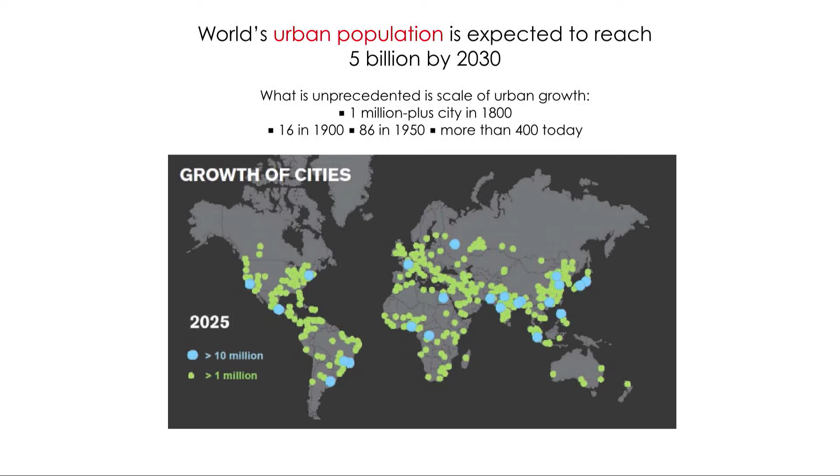First, I'd like to point out two factors that I believe mean eventually all of us will embrace floating structures as part of our development of the cities as well as the use of space. The first factor is that we know that the world's urban population is expected to rise to 5 billion by the year 2030 as people flock to the cities due to job prospects, better food, better medical facilities, as well as a lot more fun and excitement in cities.

In 1800, there was only one city above 1 million, and that's London. Then there were 16 cities in 1900 that went beyond 1 million, and today we have more than 400 cities that are more than 1 million. And our population in the cities actually increased dramatically. In the 1970s, we talked about big cities of 20 million. But in 2015, right now, cities have reached 30 million, and it cannot keep on going at this rate.

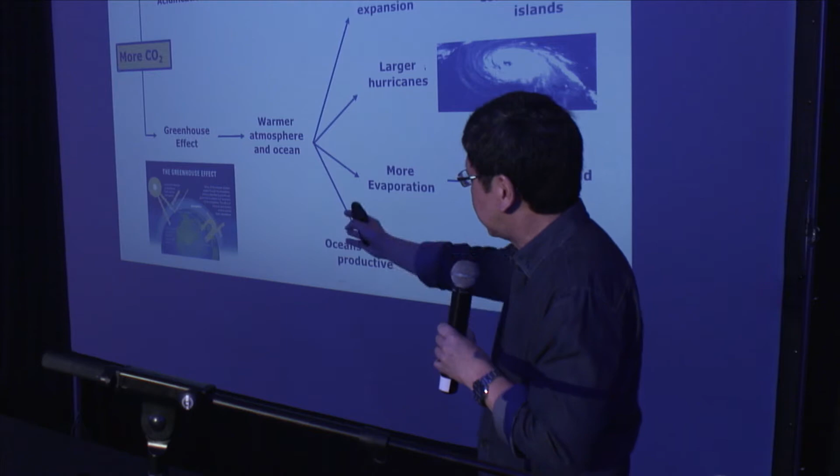And the second factor is that because of the effect of carbon dioxide emission, we are seeing a lot of changes to our planet. Of course, ocean acidification leads to the coral reefs being completely destroyed and less productive fisheries. And the other point about carbon dioxide emission is that it leads to greenhouse effects that warm up our atmosphere and lead to thermal expansion of our ocean, and therefore a sea level rise.

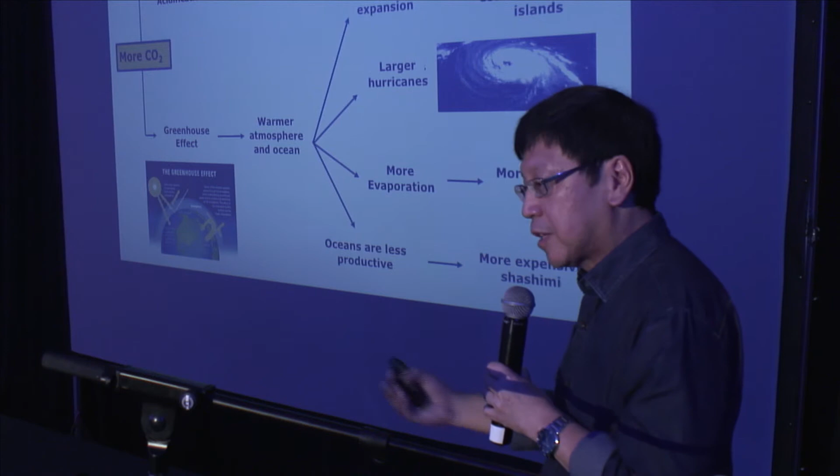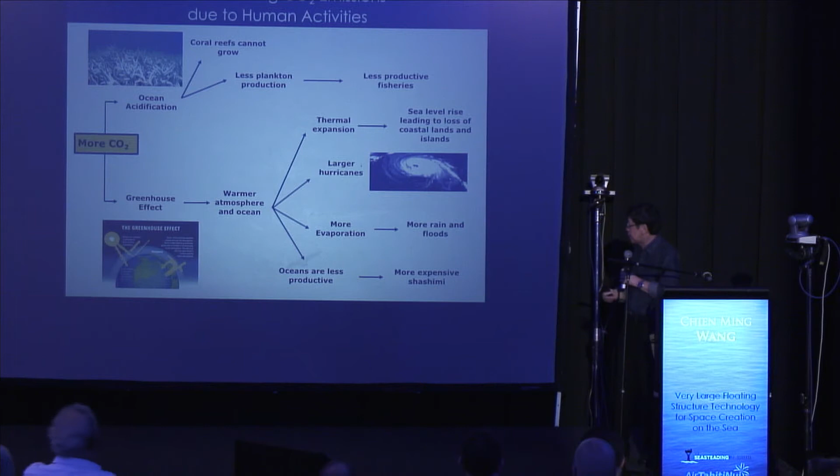We witness larger hurricanes because of the great amount of energy they pick up from the warm oceans before arriving on land. And there will be more evaporation leading to greater floods and rain, and oceans become less productive, leading to more and more expensive fish if we want to eat them.

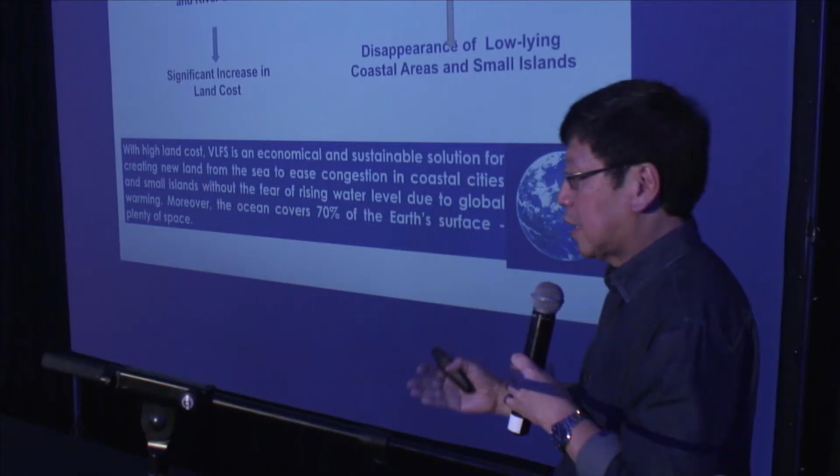So with these two factors, the densification of cities that are usually found on the coastlines as well as on riverbanks or water bodies leads to a significant rise in land costs. It makes floating structures now become very, very economically viable.

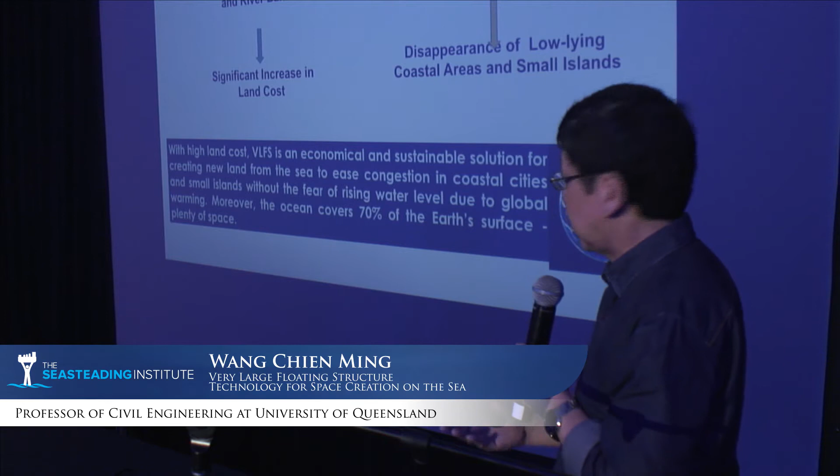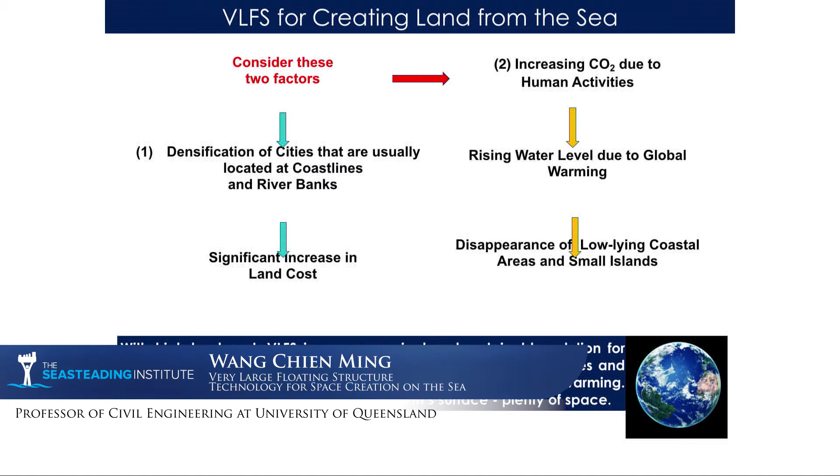And at the same time, carbon dioxide leads to rising water levels and the disappearance of low-lying coastal areas and small islands. So with very high land costs, very large floating structures become a very economical and sustainable solution for creating new land from the sea to ease congestion in coastal cities and small islands without the fear of rising water levels due to global warming. In fact, we have so much water space. 70% of the Earth's surface is covered by our oceans and seas.

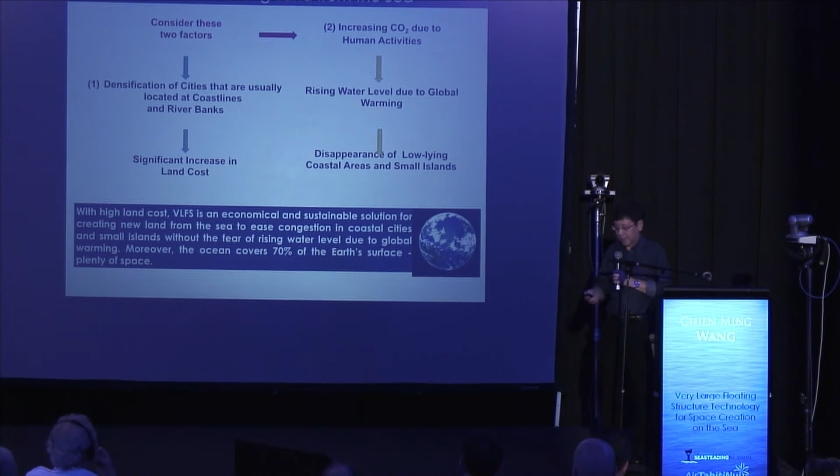Okay, in today's talk, I'm going to tell you a little bit of what is involved in a floating structure and what we can do with floating structures. What are the present applications and future applications of floating structures?

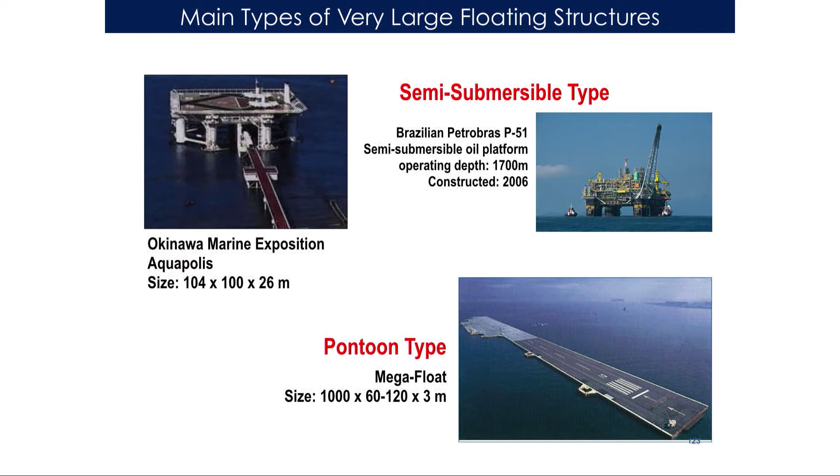Now, basically, there are two main types of floating structures. One type is called a semi-submersible type, where the platform is raised from the water level by columns that give you the ballast. And these are deployed in very high seas where the waves are very, very strong. So if you want to build in the high seas, you need a semi-submersible type.

The other type, which is cheaper, doesn't need the column tubes and so on to lift the platform. The platform just lies and rests on the surface of the water, and that's called the pontoon type.

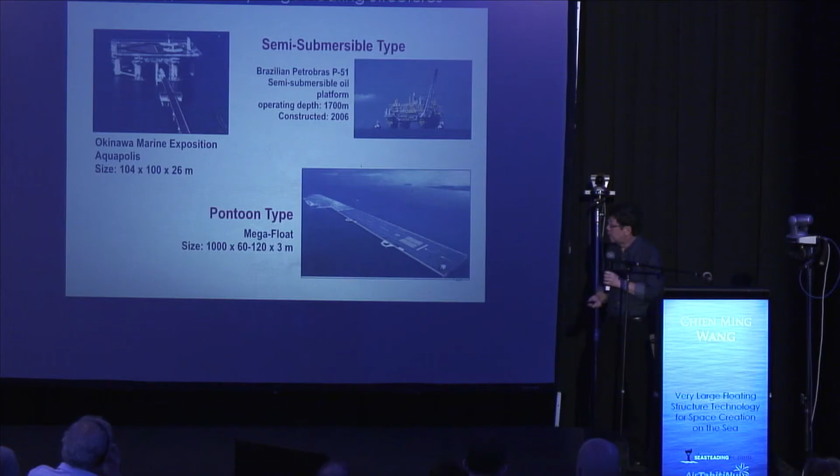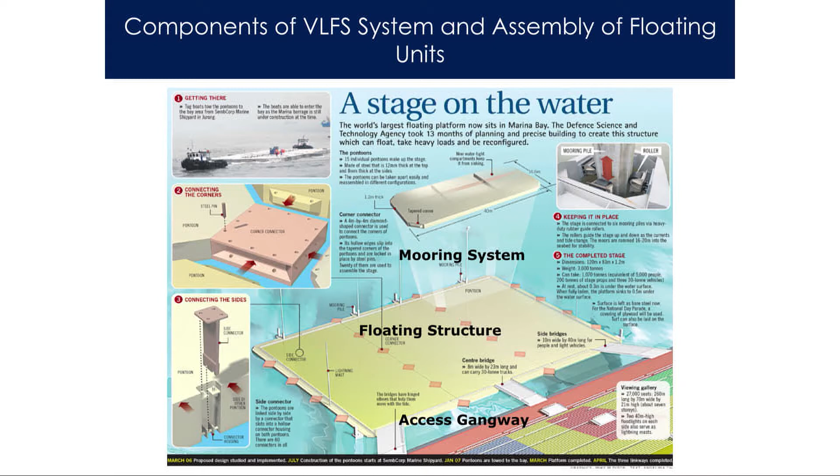It's very, very economical, and it's deployed in very calm seas, such as in a lagoon, cove, or harbor. Okay, so what are the components in a very large floating structure? For a large floating structure, you need a mooring system. The mooring system keeps the floating structure in position. It restricts movement in the horizontal plane, but it allows the floating structure to move in a vertical direction, allowing for different payloads as well as tidal variation.

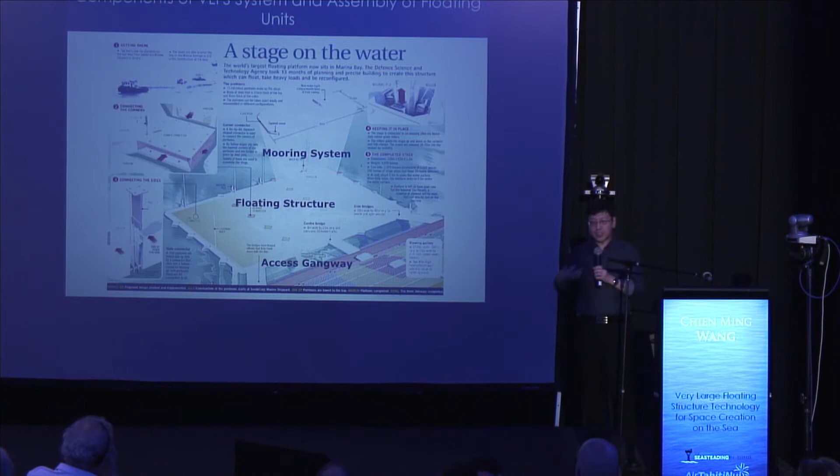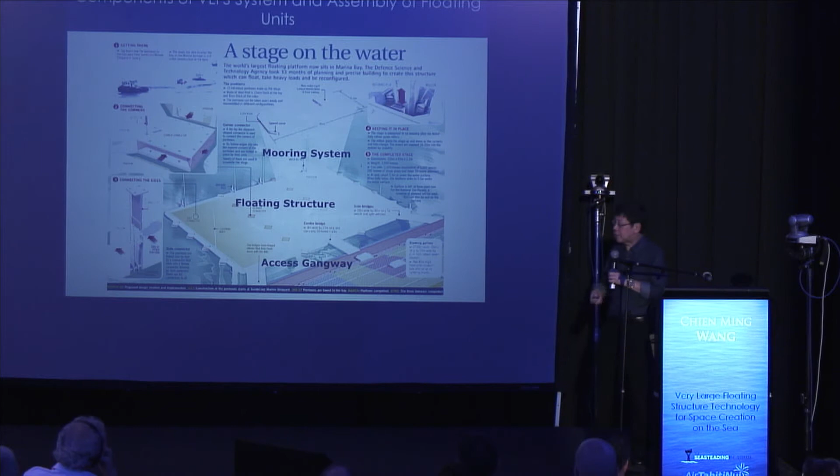At the same time, you must get some access to your floating structure. If it is very close to the shoreline, you can have an access gangway or linkway. But if it is further away, we can build a floating road or floating bridge to your structure. However, if it is much, much further away, you need to create berthing facilities for your boats and ships to come by to supply your floating structure and also to remove whatever waste and supplies from the structure.

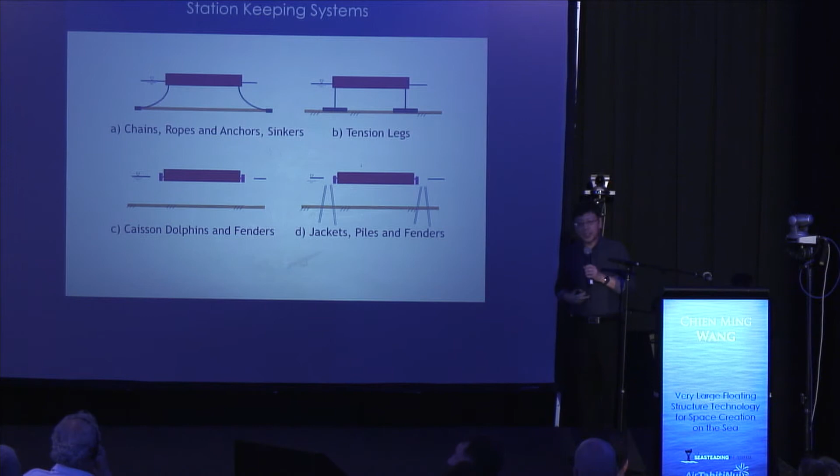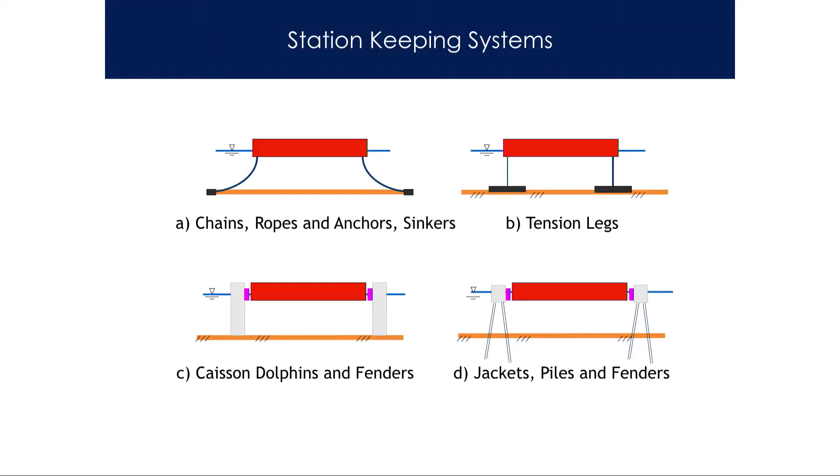I just want to show you the different kinds of station keeping systems. You can have a very simple station keeping system using chains, ropes, anchors and sinkers. But this will allow the floating structure to move considerably because it is free to move with the water currents. The other type is inspired by tension leg platforms. You can have tethers that go down to the hard rock, using anchors or torpedoes, piles, to hold the floating structure. So it's like an inverted pendulum.

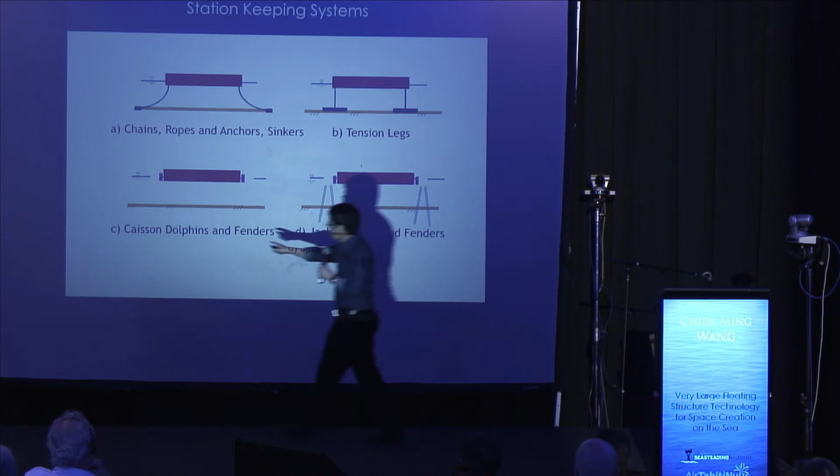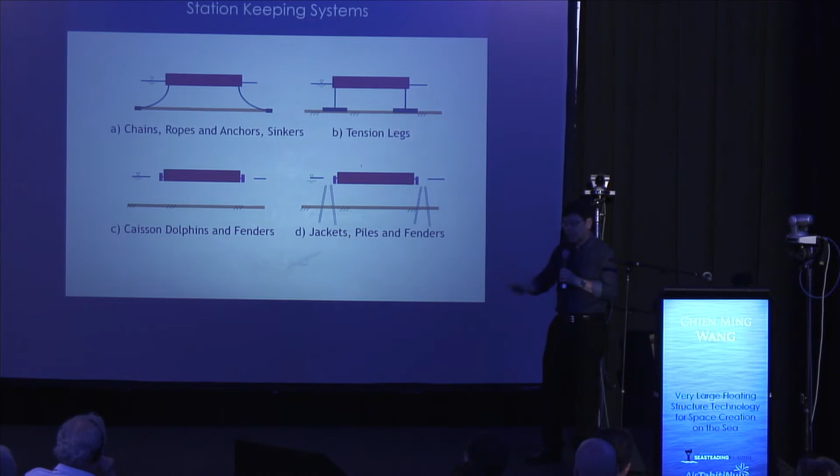Of course, unfortunately, it doesn't come out that well. There is a caisson, which is a rectangular block. It doesn't show up in this diagram here. Caissons are just big boxes that are floated out to position. The seabed is treated and the caisson is sunk in place to provide that reaction wall so that the floating structure can be kept in place by this caisson, dolphins, and rubber fender system.

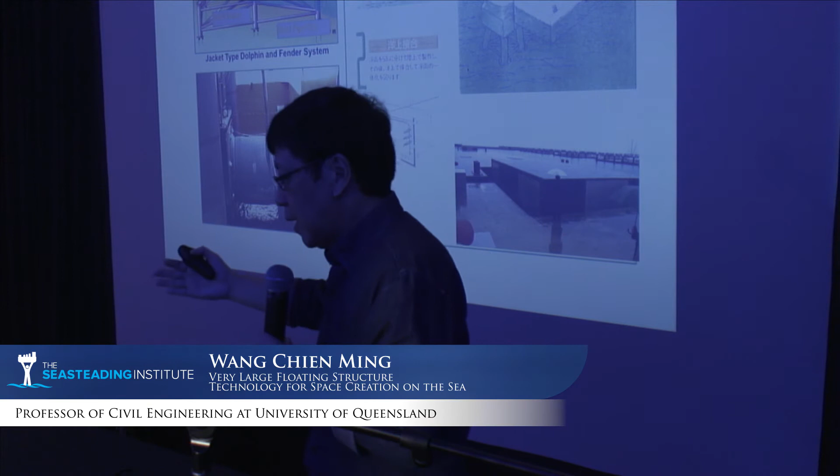If your seabed is not hard at all, you need to use the jacket pile type fenders. Unfortunately, the diagram does not show up that well here. Let me show you how it looks. For example, you could have the jacket pile underneath the water, with a collar and a mooring dolphin head to hold the floating platform in position. Now, the rubber fenders are critical because they allow the absorption of the horizontal force due to the current as well as the wave and the wind on your floating structure.

The rubber fenders are not cheap. Some of them are about $200,000, but they can last 30 years. But they are essential for very large floating structures to keep them in place and to absorb the energy so that your mooring dolphins are not unduly huge.

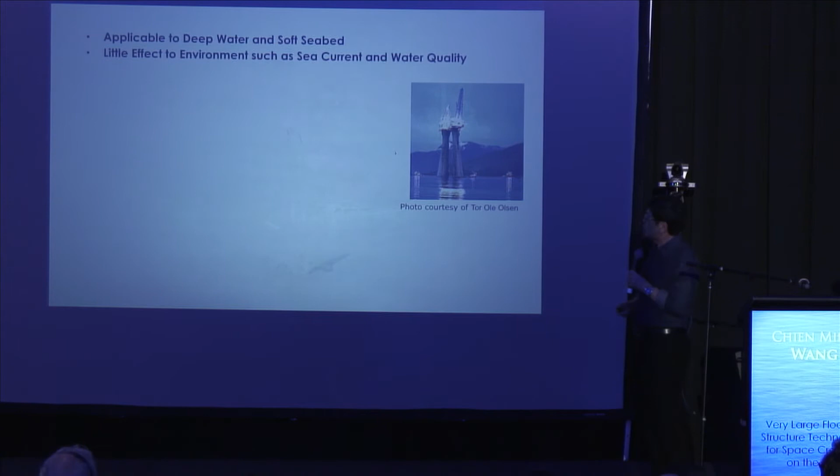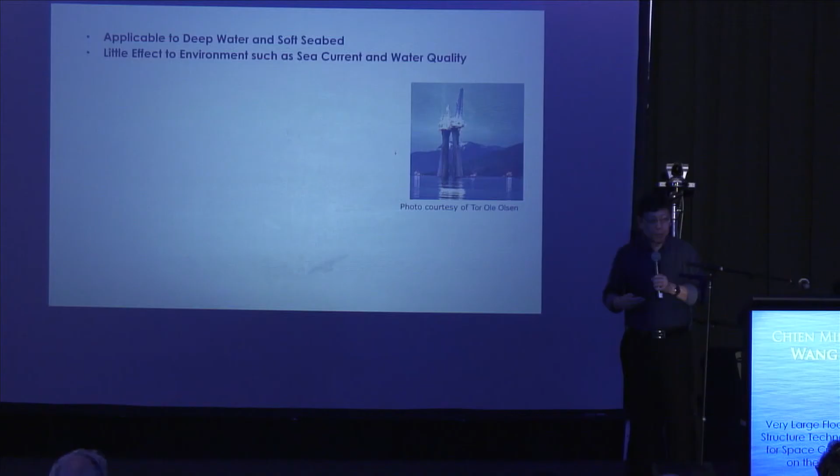What are the advantages of very large floating structures over traditional land reclamation? First, it is very, very economical when you're dealing with deep water and soft seabed. When I talk about deep water, I'm talking about 25 meters and beyond. Anything 25 meters and beyond, it is not possible for land reclamation. It costs a bomb, and in fact, you can lose your whole assets and resources trying to reclaim very deep water. And soft seabed is also dangerous.

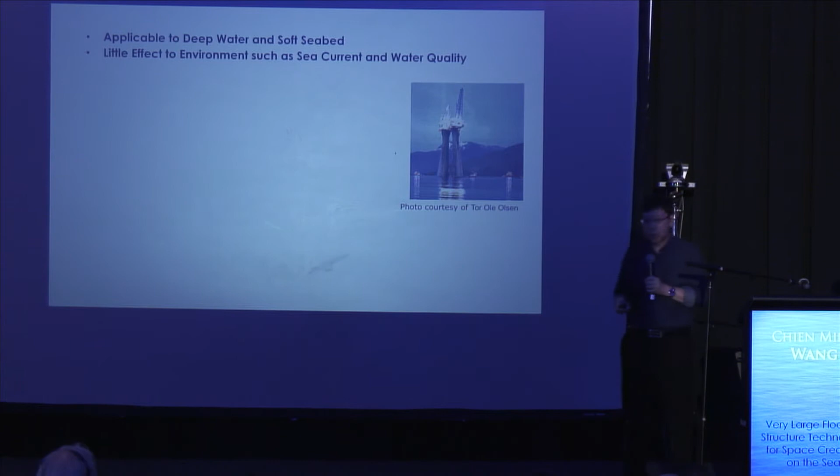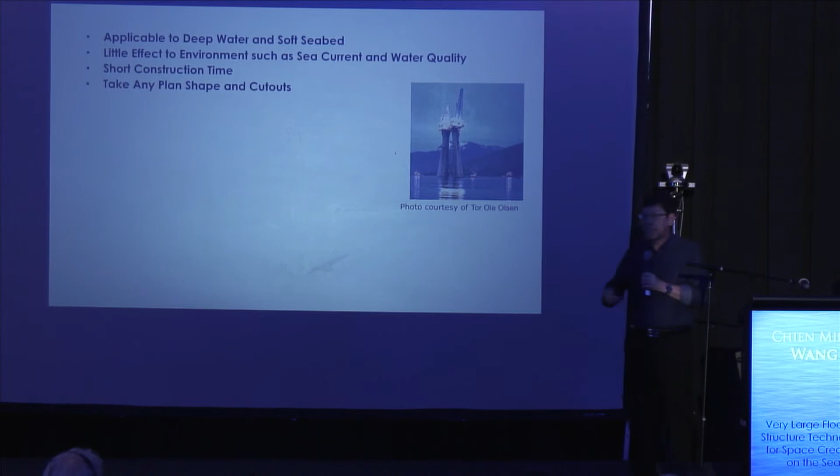When you reclaim, the fill material just sinks deep into the ground, and it'd be incredibly expensive to do land reclamation. Also, a very large floating structure has very little effect on the environment, such as the sea current and water quality. It's almost transparent, allowing any flow of water and sea current below it. Also, very short construction time. You can build very large floating structures within months, whereas with land reclamation, you need many years for consolidation before you can build anything on it.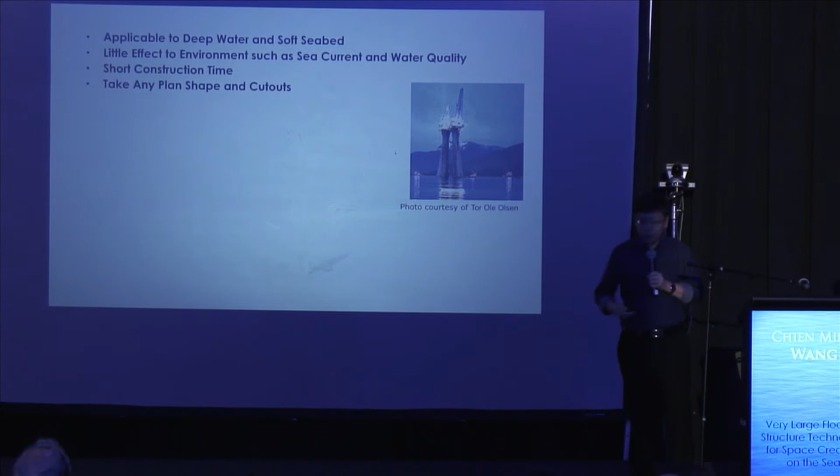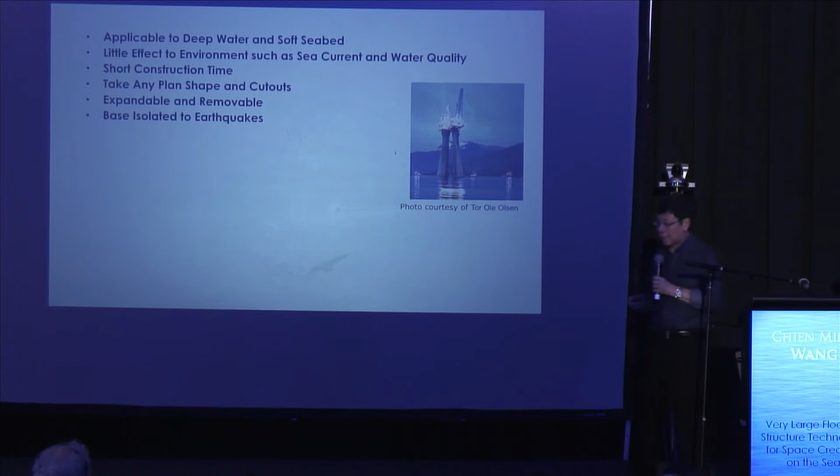It can take any plan shape and cutouts. Your floating island can be of any shape you wish. If you wish to have the shape of your face, we can do that as well. So that's no problem whatsoever. And it's expandable and removable, allowing you to free up sea space if you want to. Business is good, you expand it. It's great against seismic action because it's base isolated, so it's immune to seismic action.

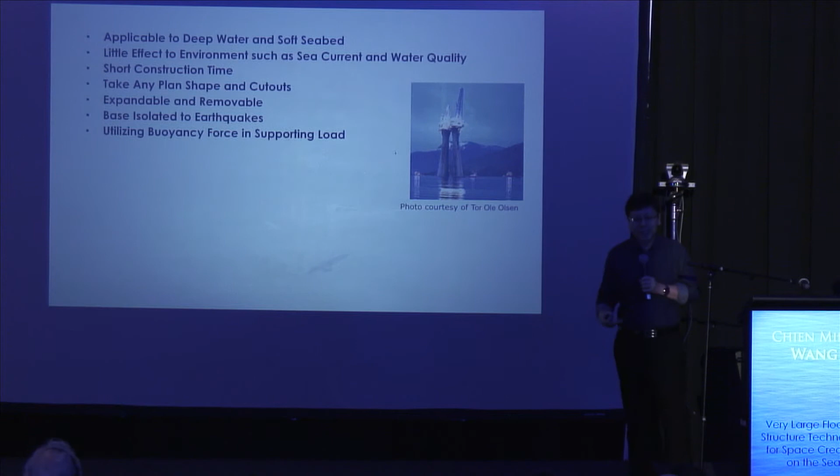It utilizes buoyancy force to support the load, so nature gives you a free pass for this. If you look at the Troll on this particular picture here, you can see that this Troll is about 472 meters in height. It's about 168,000 tons. You can move such a huge structure on water free of charge. If you were to use a crane or rail or whatever on land, it would cost you a bomb to move such a huge structure.

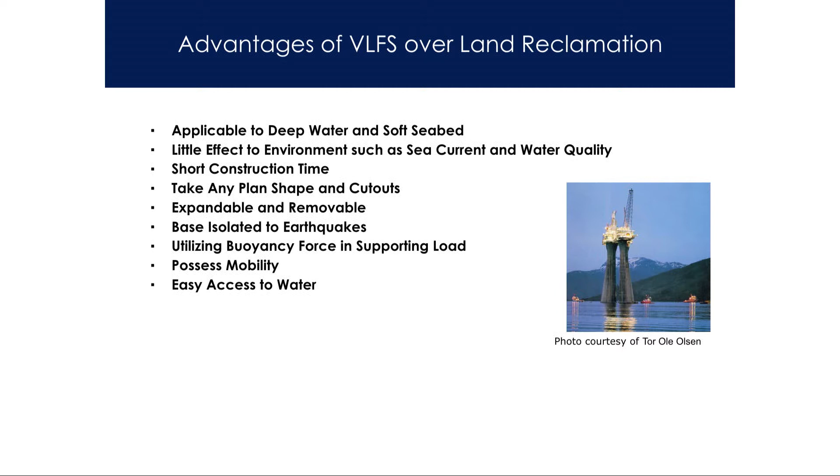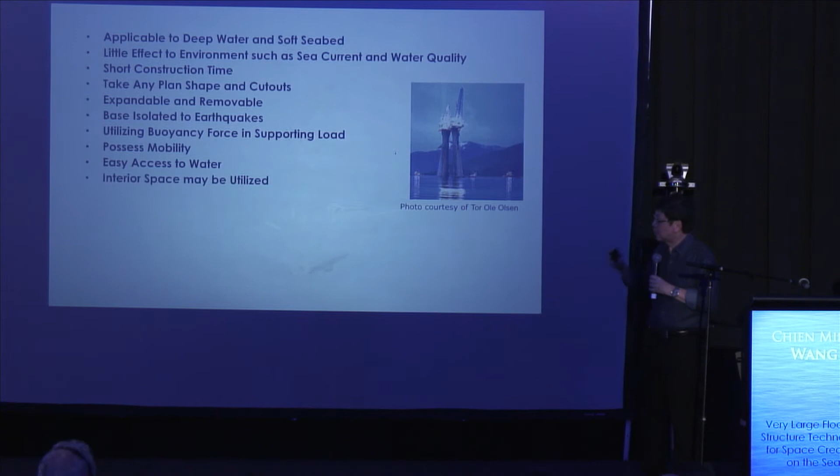Also, it possesses mobility. You can tow it away to any location. For if you've got a desalination plant and that area is contaminated, you can move your floating desalination plant to another area. Easy access to water, so make full use of that easy access to water for your applications. And the interior space may be utilized for storage, for sewerage systems and so on.

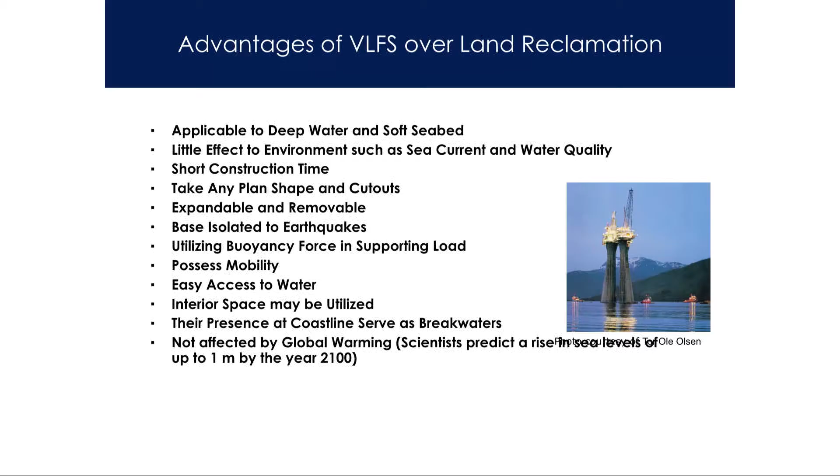The presence on the coastline serves as breakwaters to protect your shoreline, as well as it is not affected by global warming at all. It's like Noah's Ark. It just floats with it. So I want to show to you some interesting applications of very large floating structures.

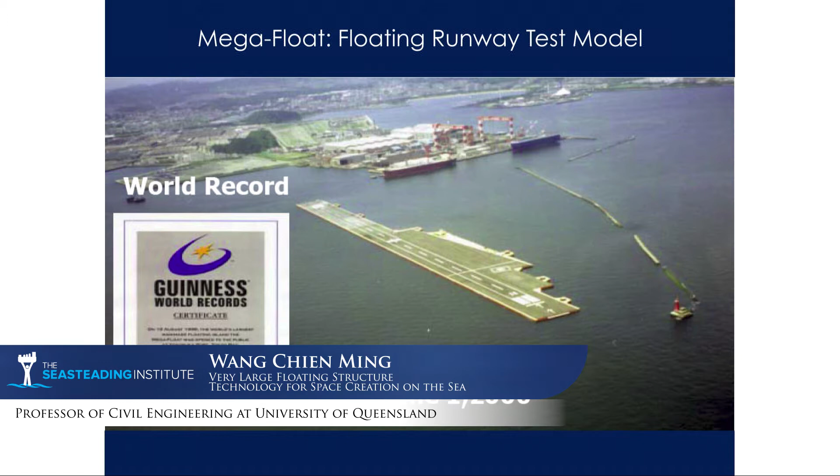And then the Japanese, in the years 1995 to 2000, initiated a program to study the feasibility of a floating airport on the sea. They built this Mega-Float, which is 1 kilometer long, and the width varies from 60 meters to 120 meters. Completed within 3 months construction-wise, moored in Tokyo harbor to study aircraft landing and see whether the devices are affected by the surge, pitch, and roll of the structure.

When I stepped on this Mega-Float, I was amazed. It's almost like stepping on land. You can't even feel a thing. It's just like a fly on the back of an elephant. Would an elephant know that there's a fly there? Absolutely not. That is how it is. The bigger your floating structure is, the more stable it is. It's almost like land. And it went into the Guinness Book of Records as the largest floating man-made island.

Floating bridges and roads are everywhere. King Xerxes, the Persian king, marched his troops to Europe to try to conquer Europe. And they tied 300 boats to form a floating bridge. He built 2 of them and marched over 100,000 troops.

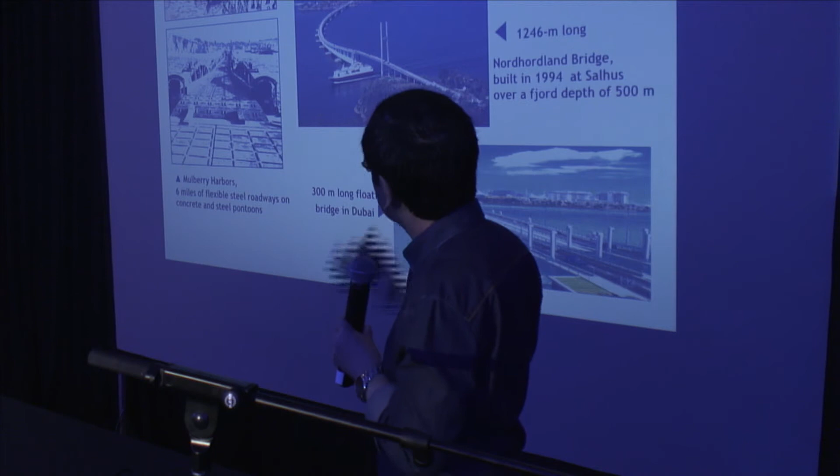The Norwegians used their offshore technology to build floating bridges across their fjords, which are very, very deep. Fjords are 300 meters to 500 meters, impossible to pier down. So they are building these very interesting floating structures, very elegant. For example, the Bergsøysund Bridge uses the flexibility of a connecting rod to move up and down under tidal variations. It rests on 6 concrete pontoons supporting the bridge deck and, of course, the roadway on top.

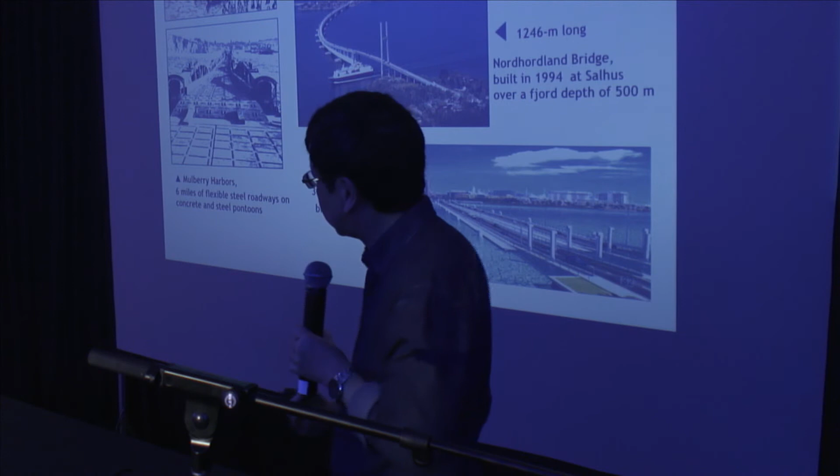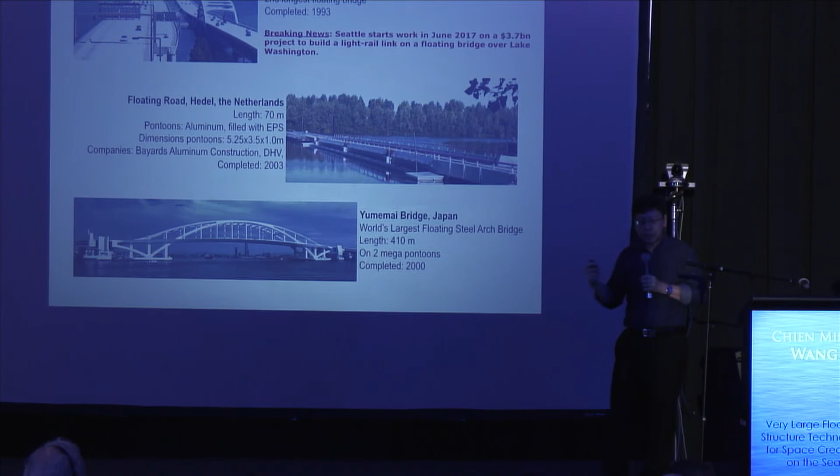Not known to many people also, during the Second World War, the British built the Mulberry Harbour, 6 miles of steel floating on concrete pontoons and steel pontoons to land troops from the ship onto the Normandy beach. Of course, Dubai has the floating bridge. Americans have built these huge, massive floating bridges in Seattle, and they are going to start work this coming June on a floating railway bridge. It's going to be great.

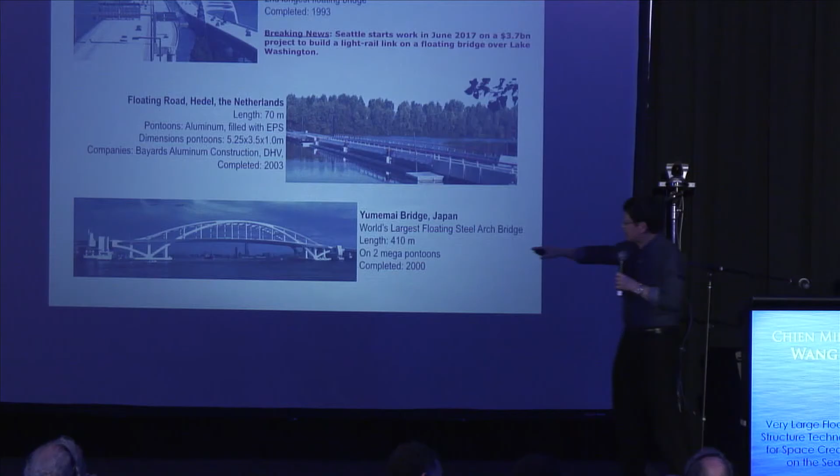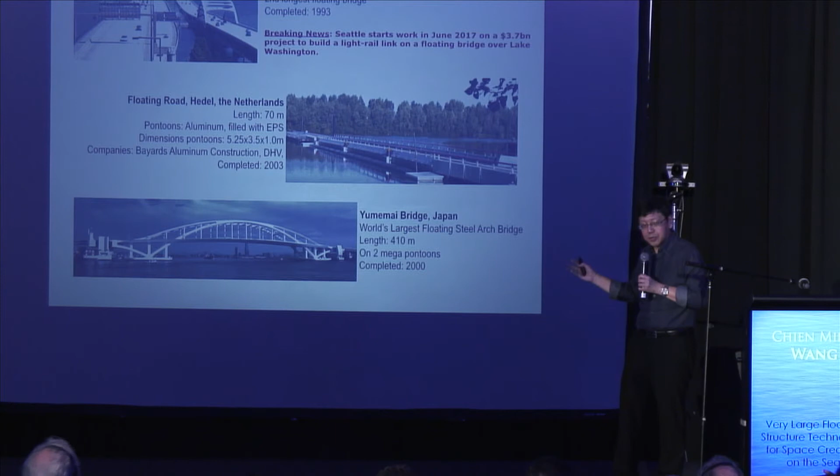And in the Netherlands, in Japan, they've built the longest floating steel arch bridge that spans between 2 reclaimed islands. It's called the Yumemai Bridge. This bridge is about 400 meters, rests on 2 pontoons, and you can see the silver lining at the bottom of the pontoons. These silver linings are made of titanium plates at the splash zones to prevent corrosion. It is able to swing on one pivot here, and the reaction walls can be opened to allow tall ships to pass

through if need be. I'm speaking a bit fast, sorry, because of time.

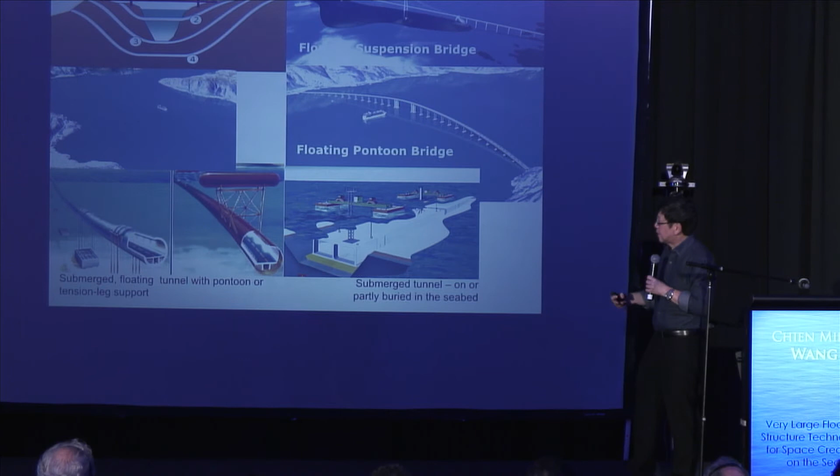And there are also ideas of submerged floating tunnels and so on, because the fjords are very, very deep. Using such technology will save a lot of cost. And in the E39 highway that Norway is building to link the country from north to south, they're going to have several of these floating bridges as well as floating tunnels.

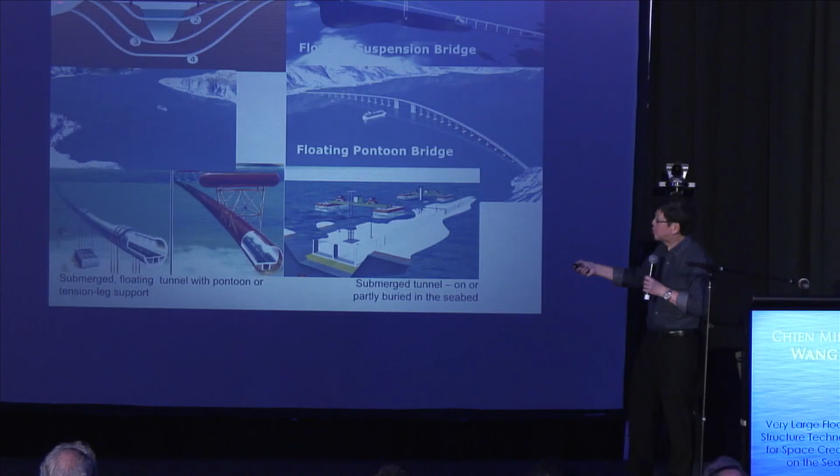You could use a subsea tunnel, but then it would mean a long, long distance, because you just can't have a very steep road going down. You need some gradient. But if you have this submerged tunnel, you can shorten it by a considerable amount. This is going to be a very exciting project that will come on stream shortly.

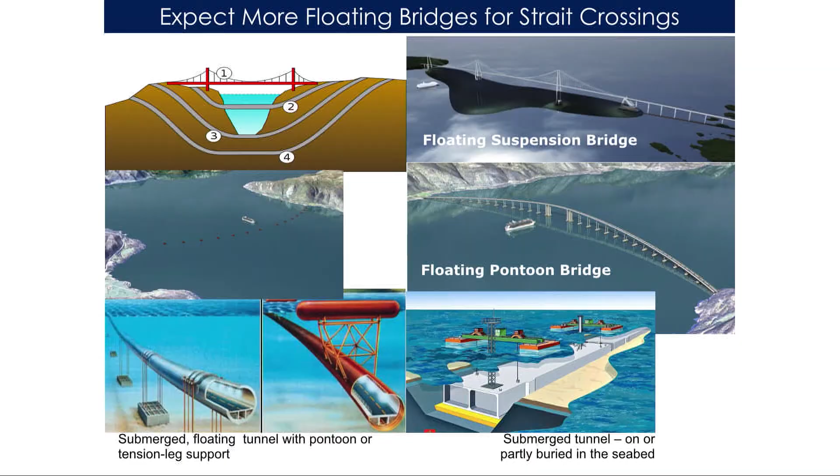Floating structures have been used for piers. The Ujina pier, a concrete pier of 150 meters by 30 meters, 4 meters in depth, has been in operation for 20-odd years without any maintenance at all.

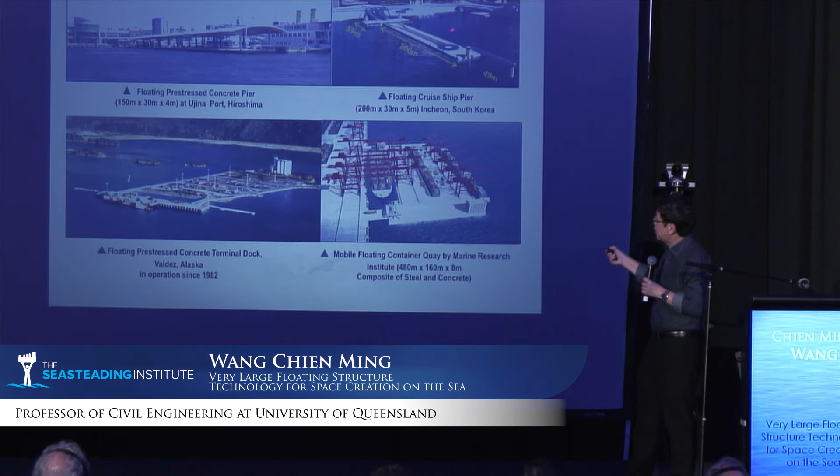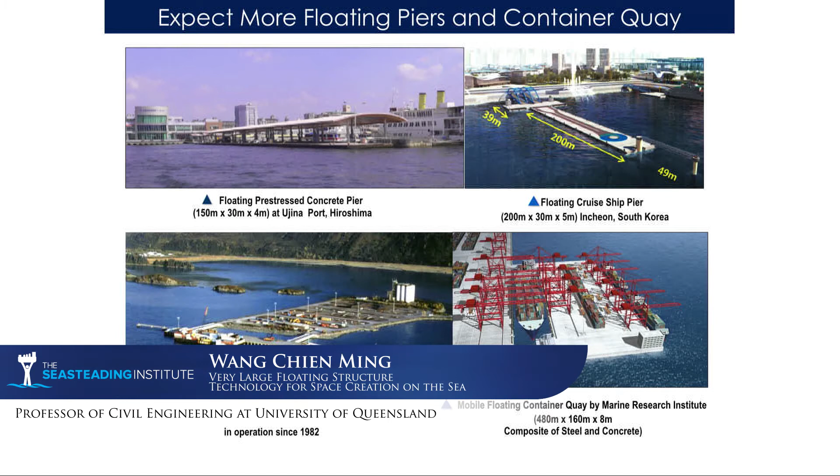And then in Korea, Incheon, they have built two floating cruise piers, one in concrete and one in steel, to demonstrate to the world the capability of building floating structures. And then, of course, in Alaska you have the floating terminal dock and so on. And Norway is going to build the floating dock as well as a cruise center for cruise ships that take tourists to see the northern lights.

Okay, I want to show you also that very large floating structures can be used for aquaculture. There are a lot of fish farms right now all over the globe, and all of them are very near shore. Some of them are inside the bay, leading to a lot of problems with pollution and so on. So there are now steps taken to try to move these floating fish farms offshore, where there will be no problem with pollution.

For example, the Norwegians with Sintef have built this cage, which is about 100 million US dollars, and it can house 1.2 million salmon. One salmon you can sell to the wholesaler for 10 euros, so it's about 12 million euros per cage. So the cage had better not get damaged, because if it does, they just lose $12 million in one go. And there's Aquapods in Hawaii, and they are looking at all these projects.

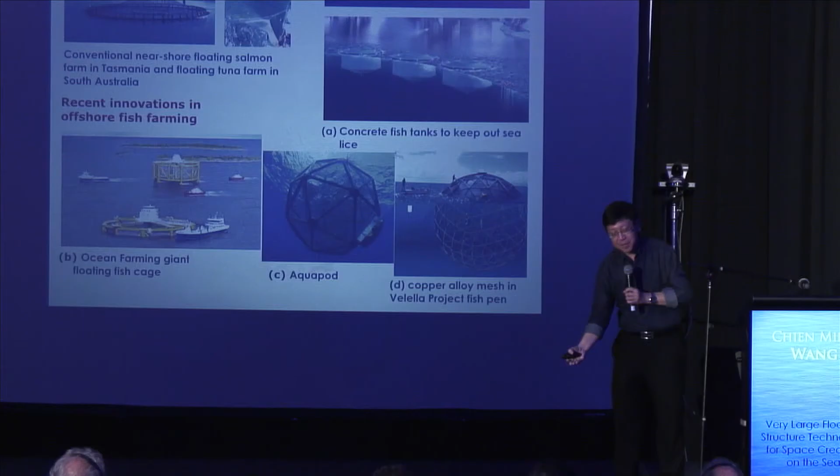In Norway, when they farm the salmon, they discovered they're also farming sea lice, and the sea lice are eating the salmon up. So what they're doing is building concrete tanks and putting a riser down there to bring water from 14 meters below the water level so that there's no sea lice, continuously pumping it so that the fish can have fresh water. But it's costly to farm in an area where there's sea lice. You have to protect your salmon, and they are selling like hotcakes in Norway.

Everybody's having these concrete tanks instead of the usual circular floaters with nets below them. Now they're even building bigger ones, in the shape of a bathtub. Exactly, you look at your bathtub, that's exactly the shape they're building. And then fish farming: Barcelona-based Forward Thinking Architecture has been very strong in this area, and they have come up with ideas of how we can use fish farming, hydroponics, and renewable energy together to provide food.

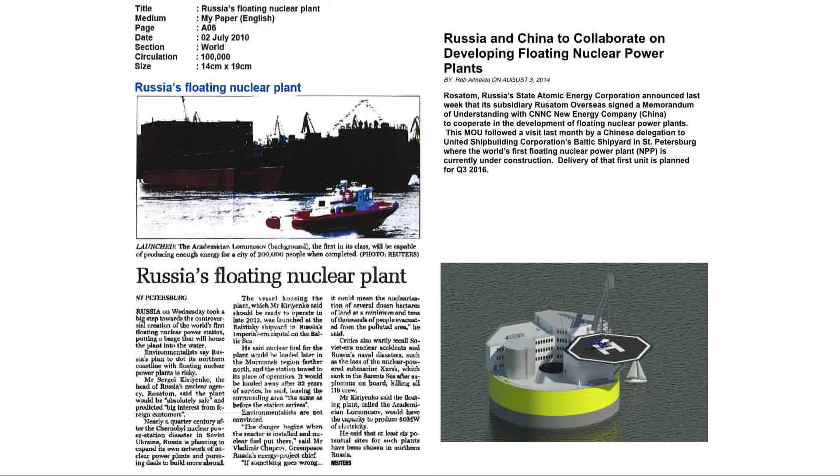Also, very large floating structures can be used for energy generation and storage, which Igor has already alluded to. Floating nuclear power plants will become very ubiquitous in time, because I think as nuclear energy becomes safer and safer, we can use that. In fact, we already have nuclear submarines and nuclear-powered aircraft carriers all over the world, and they are floating and calling at ports.

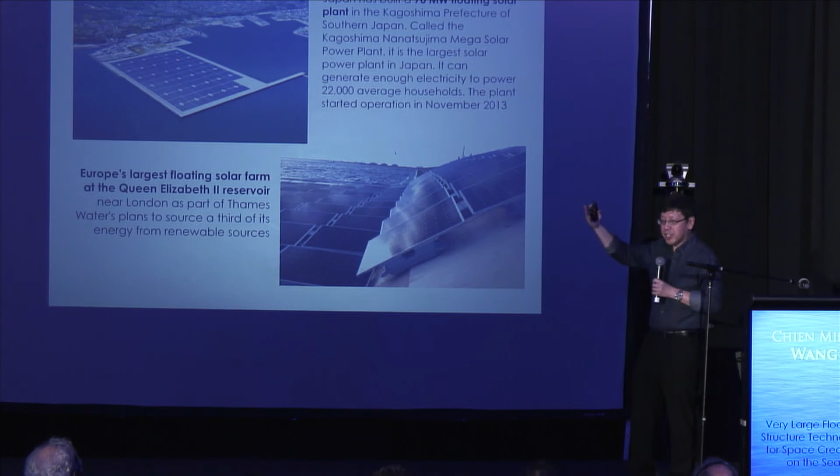Now, we also have floating solar farms. In Japan, they have built in Kagoshima a 70 megawatt floating solar plant. It is great because out in the sea there are no shadows, you get a lot of sunlight, you can generate a lot of electricity, and every country is now moving towards floating solar farms. England is going for it, India, China, and so on.

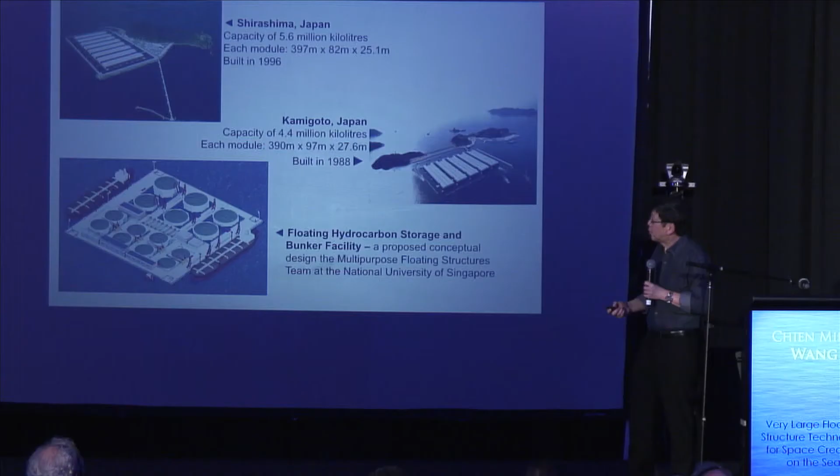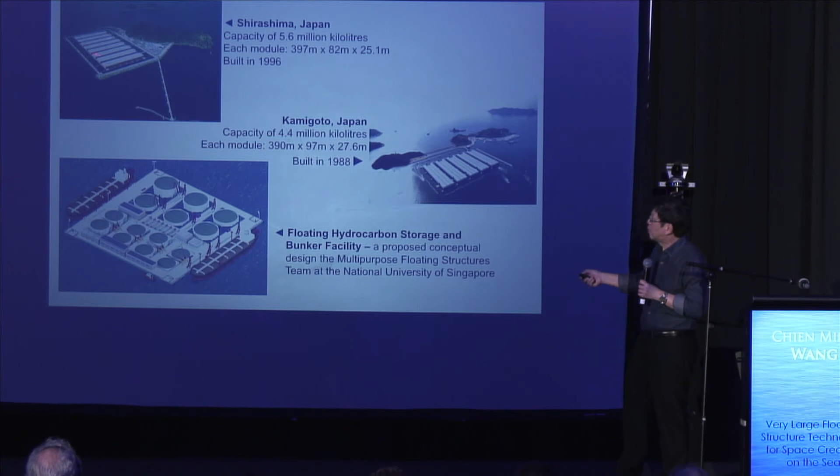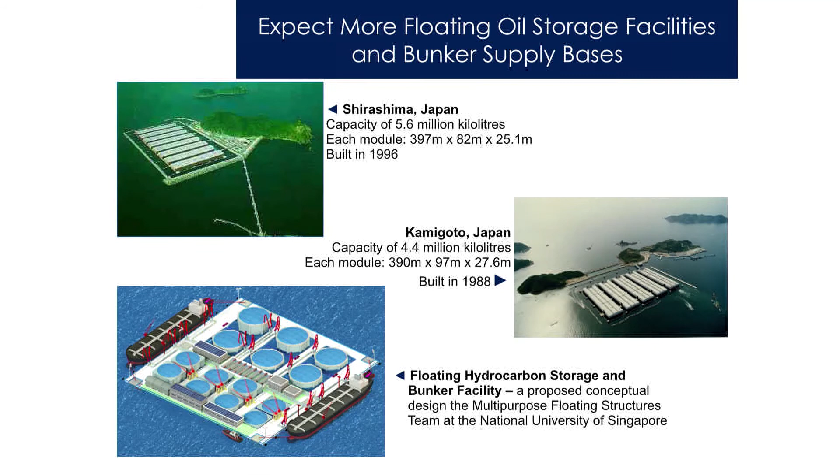Now, also we can store fuel in the sea. Fuel is lighter than water. We can store it in the sea, provided we provide a skin to hold it. In Japan, they have built these huge modules, something like 400 meters by 80 meters by 25 meters, and they can house 5.6 million kiloliters in eight modules as an oil storage base.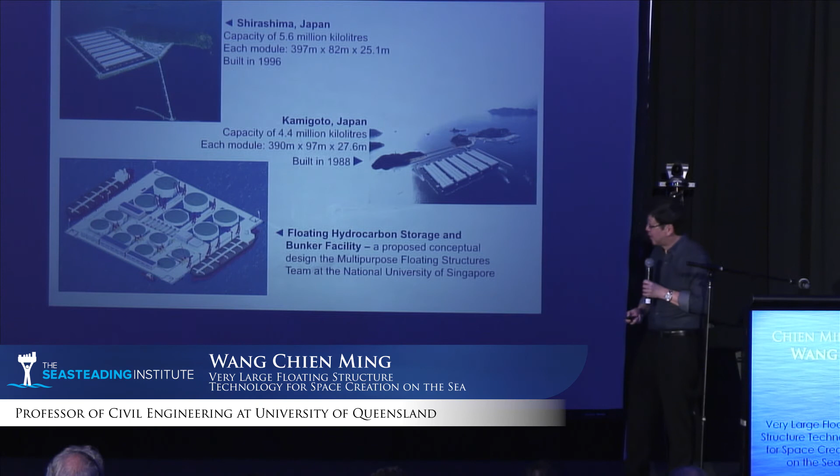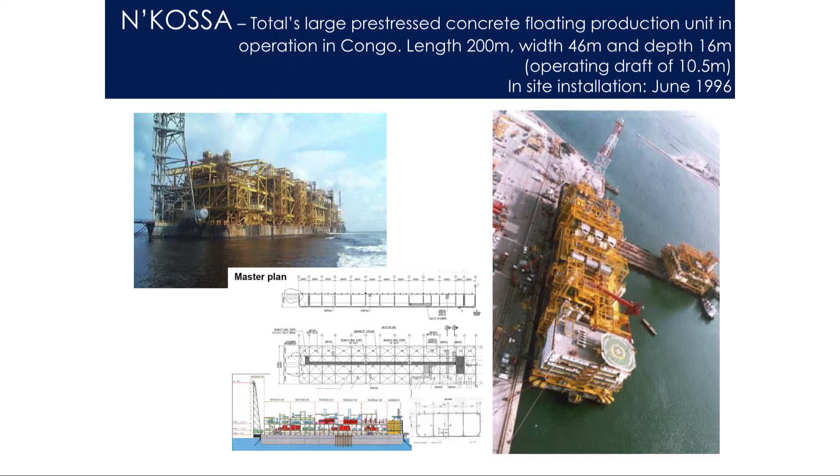And in Singapore right now, I'm working on floating hydrocarbon storage, where instead of having a huge module separated into different compartments, we individualize each tank. But the difficulty is how to get these tanks to be self-stabilizing. In other words, with the tilting and sloshing, it should be self-stabilizing, and we came up with a very, very good design, which we have patented. I do not have time to talk about this, but if you'd like to know more, I can discuss with you.

And you can see huge floating concrete platforms for storage as well as hydrocarbon production. Also, it has been used as a drone ship to receive rockets. SpaceX used it and demonstrated its capability.

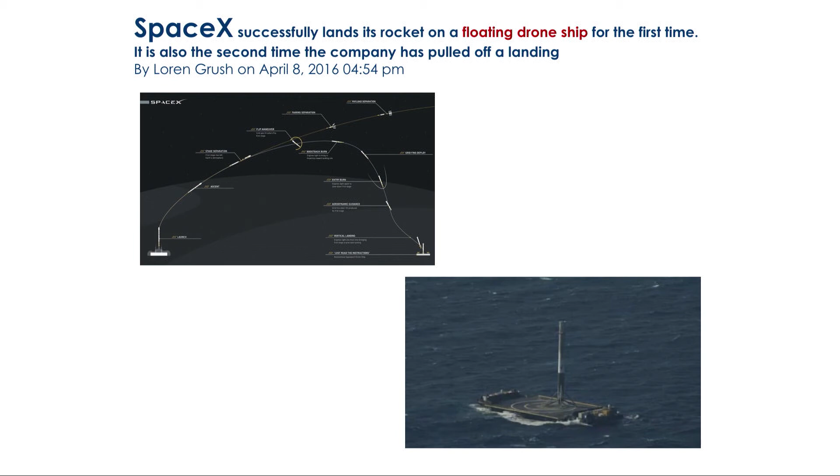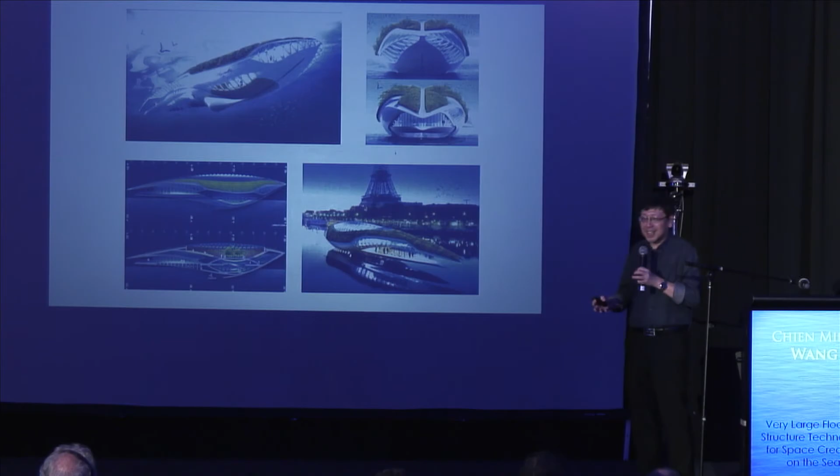Vincent Callebaut is a great architect. He's a Belgian headquartered in Paris, a good friend of mine, and he has come up with this idea: why don't we build a whale-shaped floating garden that will just drift all over in the rivers, collecting all the garbage, as well as treating the water using biofiltration.

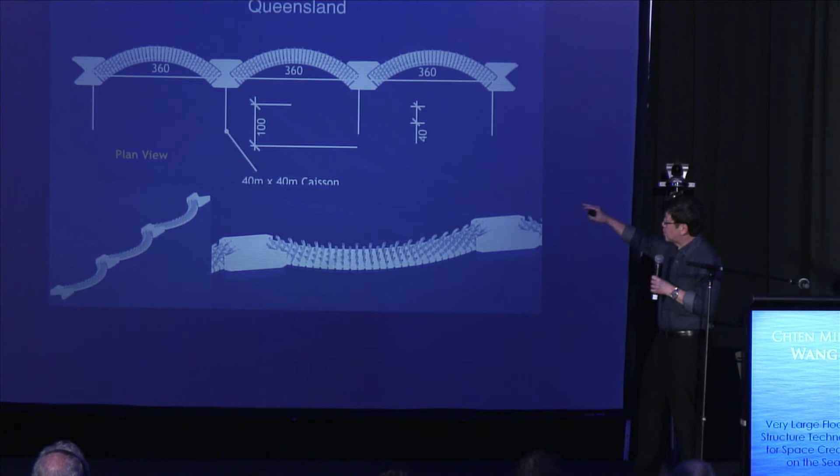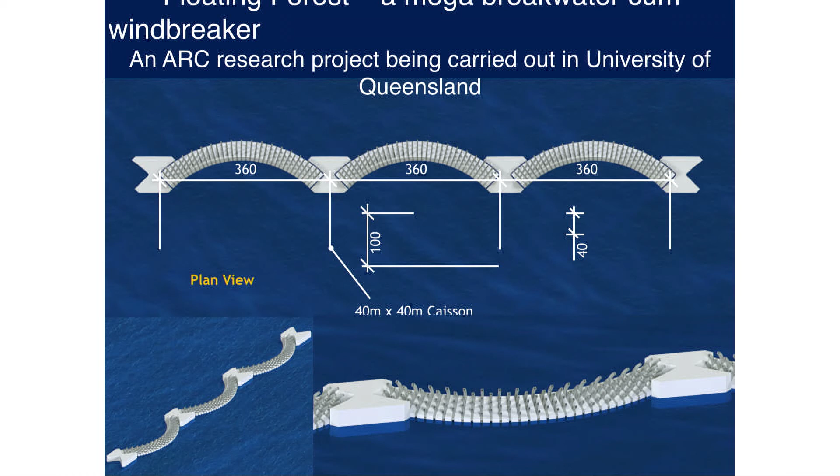Also, floating structures can be used as wave breakers, as well as windbreakers. And this is the project I'm starting at the University of Queensland, where I'm going to use a system of arches from a plan view to keep the concrete in compression, and using sloping platforms to allow the wave to run up like a beach to exhaust its energy, and also with tubes that allow water to get in and let the water spill back onto the incident wave.

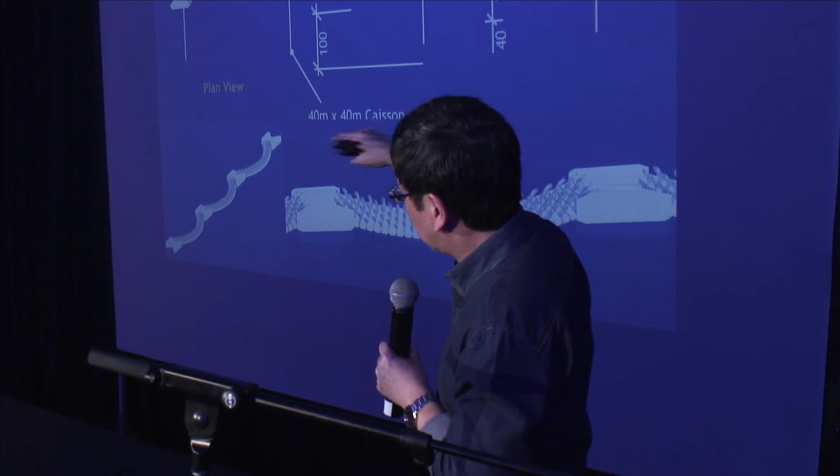So this is something very exciting, and if it works, it could be deployed. We can use a series of arches, one after the other, to break the wave at different levels.

I want to show you that you can use floating structures for this kind of... I'm not sure whether there's sound. There should be some music.

Okay, I'm sorry. I'll continue because of lack of time.

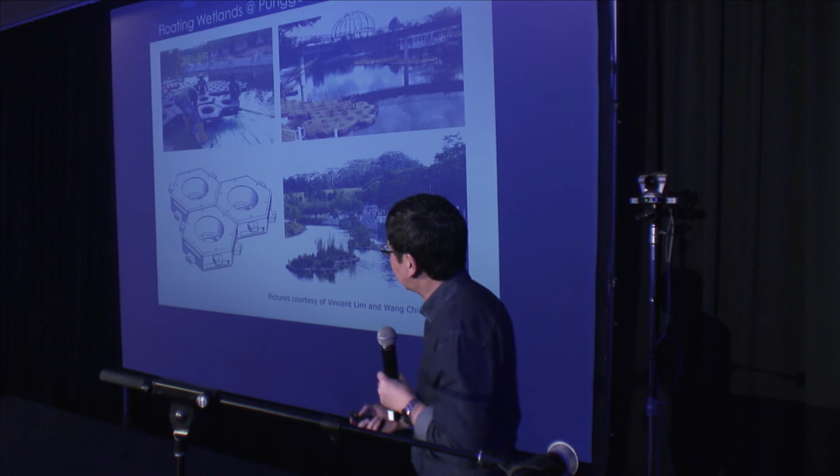I'm also involved in this floating wetlands project in Singapore. What we want to do is to create biodiversity in the rivers. When you have a sterile river, there's nothing much happening. We can build these floating wetlands comprising HDPE, high-density polyethylene modules, about 1 meter in diameter, so that it's lightweight and people can carry it. And inside there's foam, and then you have a hole there for the plants to go through.

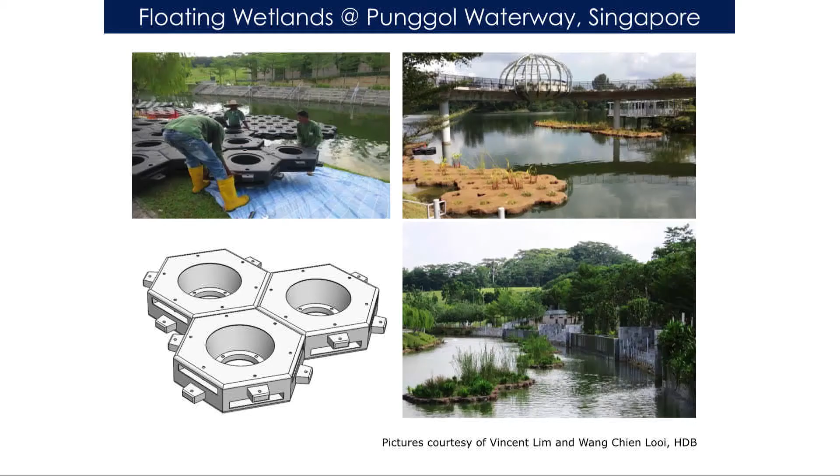And these river plants also serve to clean up the river water. And we can create all these islands, marshland, to make it very, very exciting on the rivers. And in Seoul, they have built these floating islands and brought a lot of activities to the river. So the exhibition hall, they have galleries and all that stuff.

And then in Norway, in Oslo, first it was a rundown warehouse, and that has been converted into high-rise apartments, and a lot of young Norwegian professionals love to stay here because they created a very interesting artificial beach. And this artificial beach on the platform, you can see it's been built and towed to site, and creates a wonderful beach in the midst of the city.

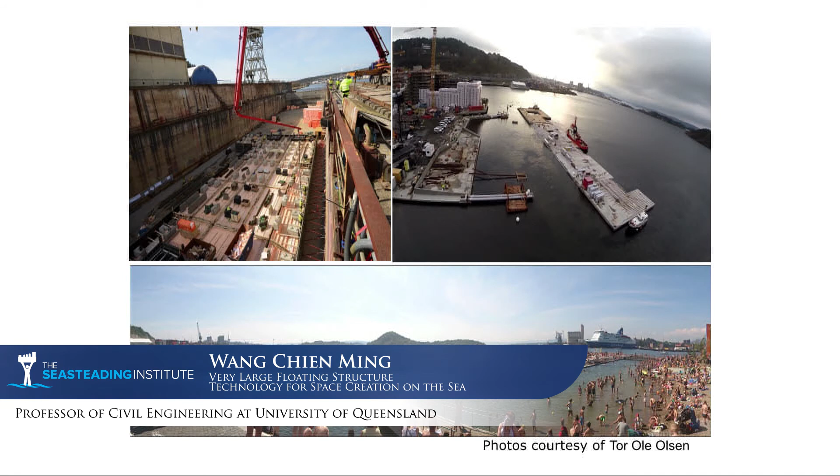You can create beaches, if you like, in places where it's not possible, using floating platforms. Also, there are floating restaurants and hotels all over the world. You have the Four Seasons Hotel, you have the Jumbo restaurant. This is one of my proposals, a floating crab restaurant. And Seasteading, feel free to use this idea.

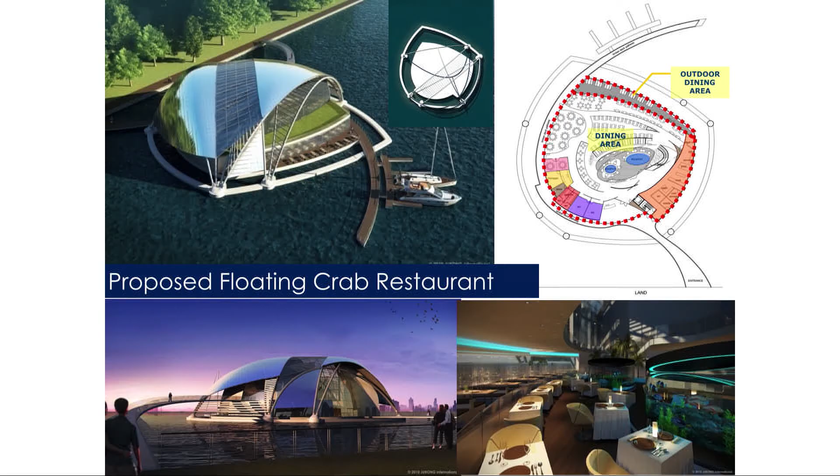What I'm going to do is use the mooring dolphins here to carry the roof loads, so that the entire floating platform is free from carrying the roof loads. So you can have uninterrupted space of 50 meters by 50 meters without any columns. And you can put your dining area and give the people a very, very nice experience. You can use this idea of using the mooring dolphins as your supporting points for your roof loads.

I was involved in this very large floating performance stage in Marina Bay. This is about 120 meters by 83 meters by 1.2 meters. And it's been loved very much by Singaporeans. All the time they enjoy the parades and the shows down there.

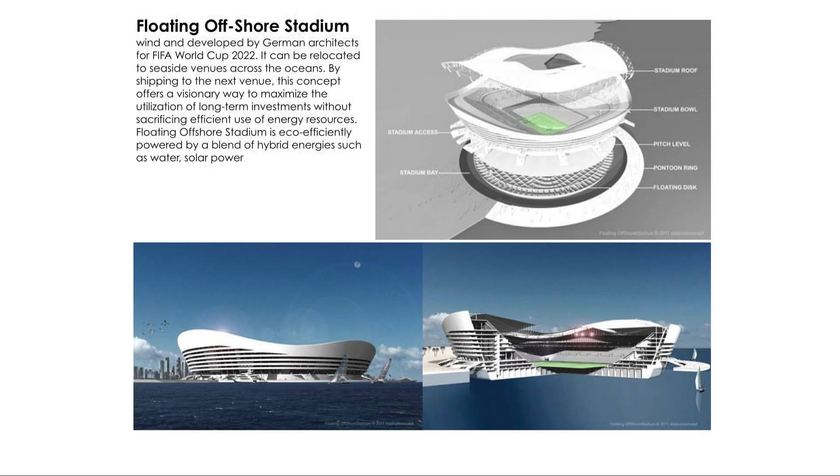The Germans say, why not build a floating stadium? Each time we have a World Cup, we have to build a stadium. Why don't we have a floating stadium that can be moved to the location? Also, the Maldives have come up with a floating golf course as well as floating hotels. Now, French Polynesia should not be outdone by the Maldives, right? You're going to do something even greater.

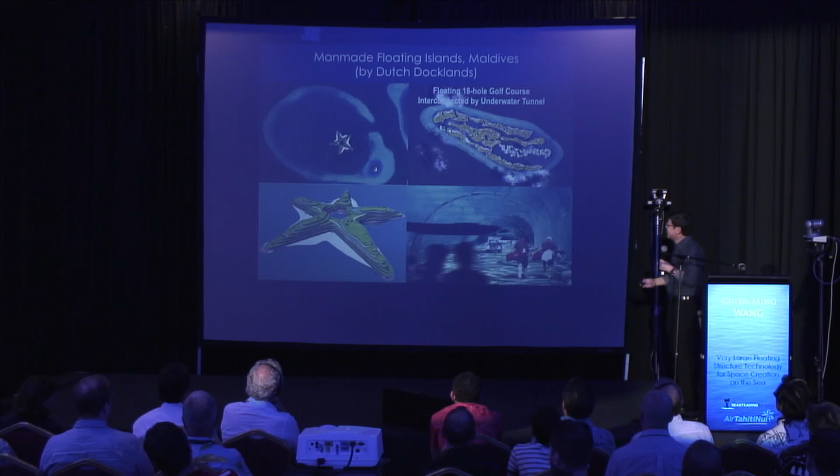Okay, people have been living on water. Oh, sorry.

Okay, right. So I just want to say that I'm so proud to see Seasteading leading the way to form the world's first floating city. I'm excited. I want to say that it's not a dream, it can become a reality. And there's a Norwegian saying which I like very much. The saying goes like this: because they say it's impossible, that's why we do it.

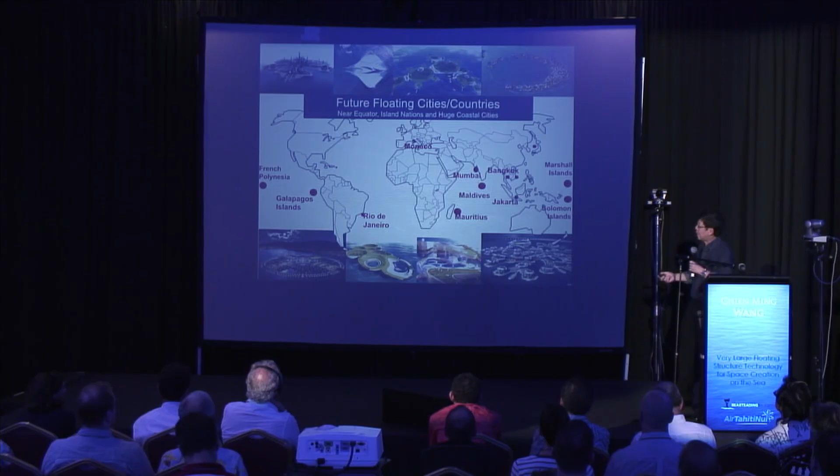Okay, so I just want to end here by saying that the world's map will be very, very different in 50 years' time. New countries will be formed in the ocean, and a lot of floating structures will crop up around all these islands. So thank you so much for your kind attention.